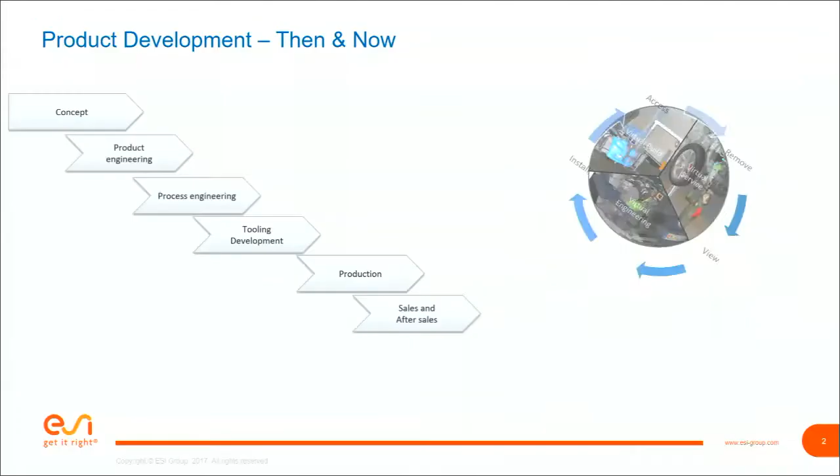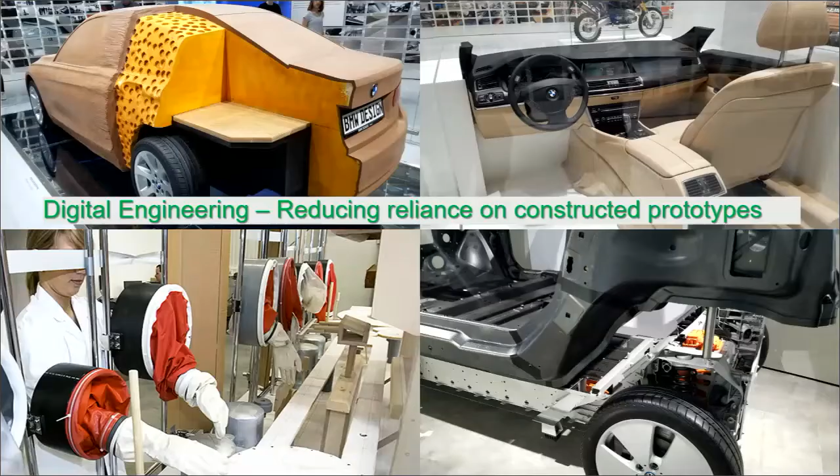So with IC.IDO, we try to create a virtual yet physically reliable, physically repeatable, real-to-life visualization—not just visualization, but an experience where I can experience the physical product I'm engineering today without access to a constructed prototype, since I've compressed the engineering timeline and removed the normal physical build points. IC.IDO lets you get back into digital engineering and access something physically reliable, that you can touch and feel and see how it looks and accesses in real life.

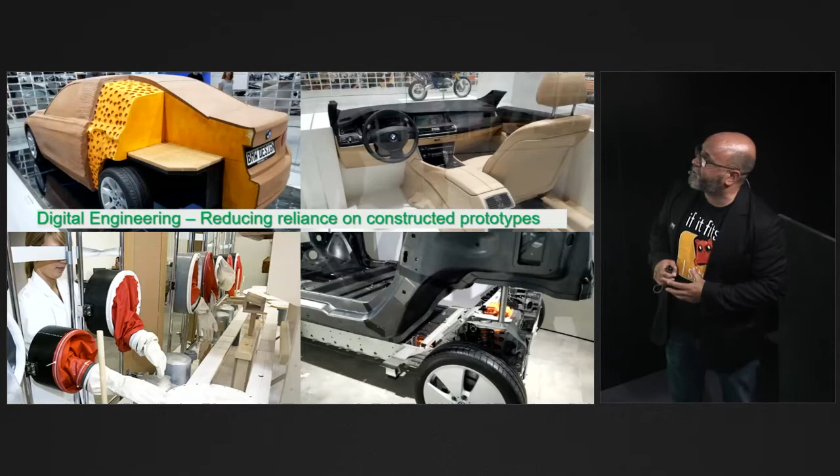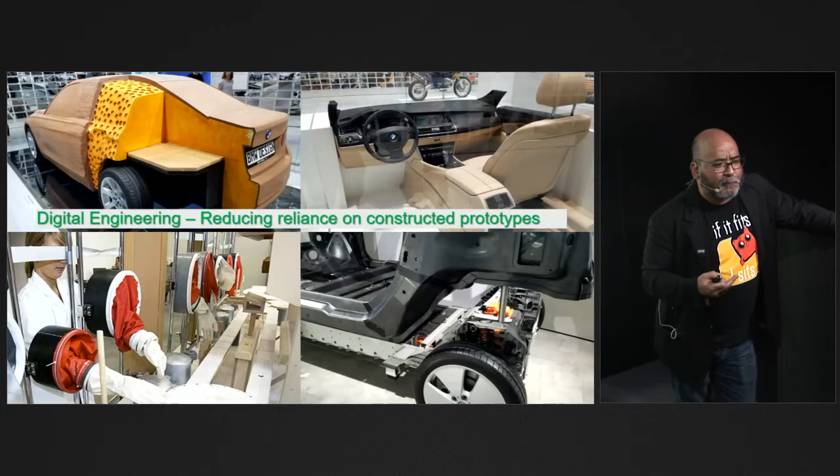Here you see one of our customers still practicing this: a cardboard, tubular metal prototype of a manufacturing cell they'd engineer for their customers. Here are clay models—people in styling and design visualization talk about doing away with clays, but there are things you can discover in physical models that you normally can't discover on a 2D flat projection. So IC.IDO lets you see and do things in a physically responsive, realistic world, to understand what it's like to touch, feel, assemble, disassemble, and service your products, working only on digital models.

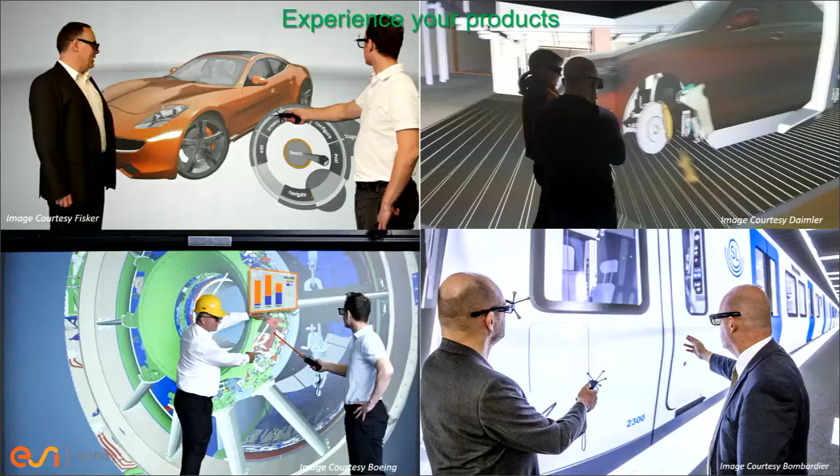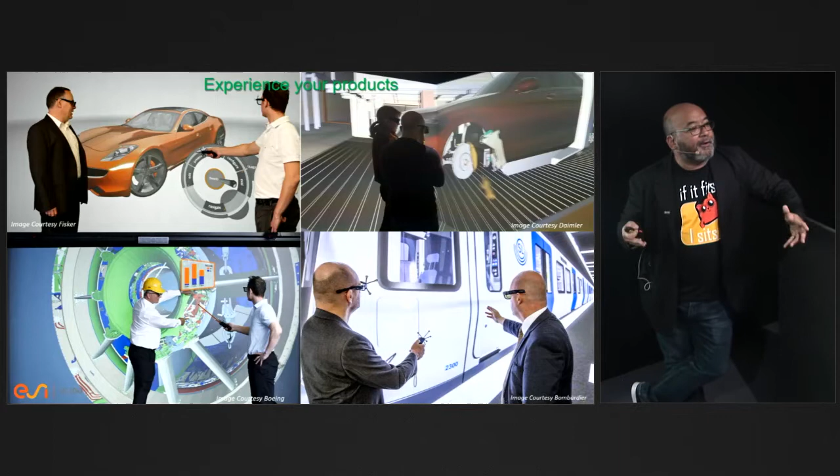These are examples of how our customers use virtual reality. Many use projected virtual reality with active stereo, but it can also be done with a more modern head-mounted display. Here people are doing engineering reviews, styling reviews of new cars, and in the top corner someone doing an assemblability and accessibility review.

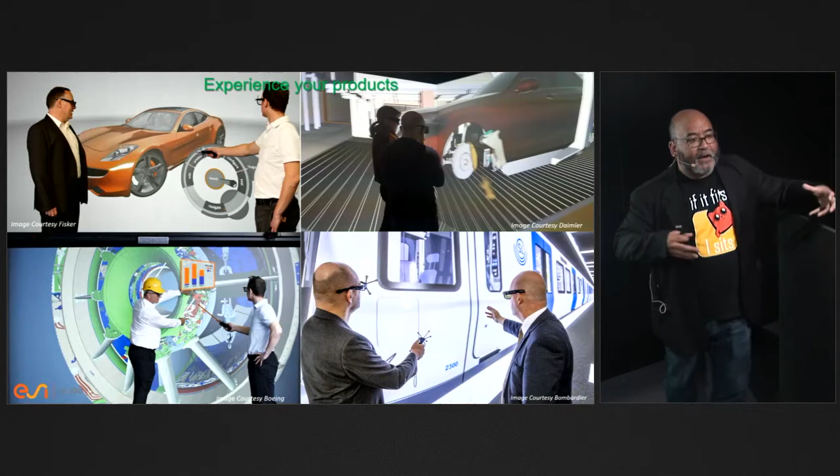We have a full-scale review of an engine turbine, and here our customer Bombardier Rail, for the first time, is able to look at a real full-scale digital model of their train, which normally they can't even view fully together in the native CAD format they draw it in. By bringing it into our environment, accelerated and powered by NVIDIA technology, they can now look at entire trains all at once in VR, whether projected as shown here or under an HMD.

That gives you a bit of the history and progression.

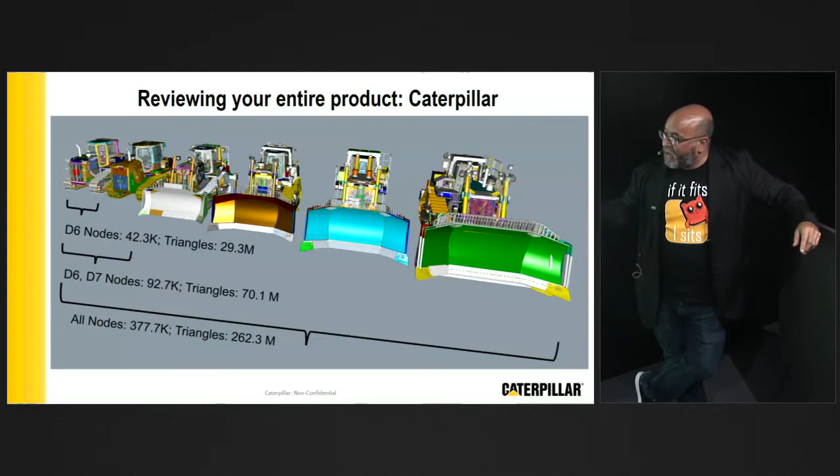But take a look at those polygon counts. For the smallest tractor they're going to sell or engineer, that's 42,000 CAD bodies and 29 million polygons. When we go to the largest in their suite and look at all of them at the same time, we're now talking about 370,000 CAD bodies and 260 million polygons.

At GTC Silicon Valley, we talked about performance—how IC.IDO has worked very closely with DevTech from NVIDIA to make sure we were able to properly leverage every new graphics architecture that came up, to see more and more performance from the graphics cards.

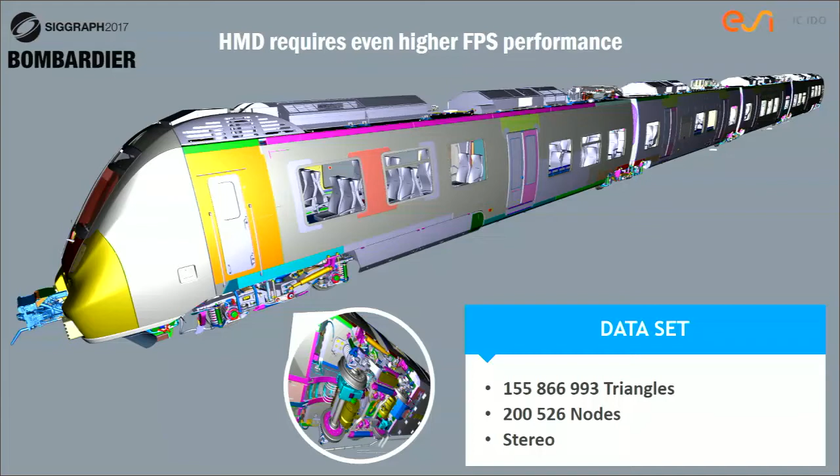At SIGGRAPH last year, I made a presentation similarly talking about how, with innovations from NVIDIA, we were able to look at this entire passenger train—2 locomotives and 2 passenger cars in between. We're talking about 155 million triangles, 200,000 CAD bodies.

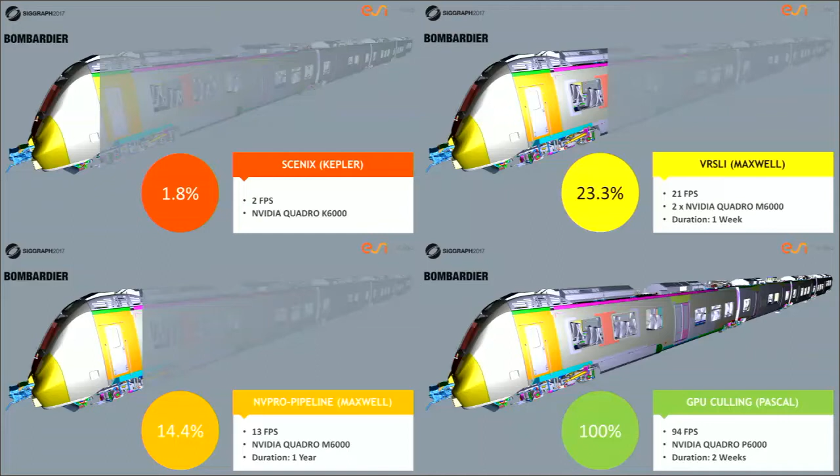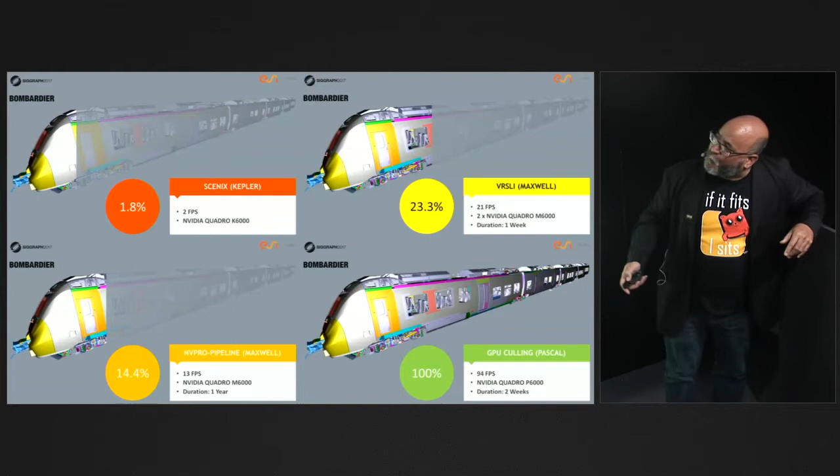Going back to the K6000, our version 10.2, that's 3 years ago for our software evolution—the frame rate if we loaded that full model into VR was about 2 frames per second. We would have had to reduce that model down to only about 2% of the CAD bodies to get a reasonable frame rate in an HMD. So I could only look at maybe the front windscreen of the train, but I don't sell entire trains by looking at the front windscreen only.

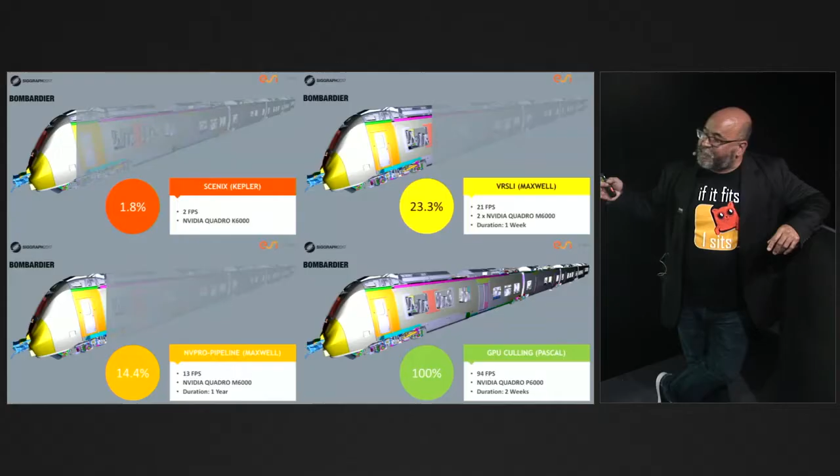Now, along comes NVPro-Pipeline with the Maxwell. Using the Maxwell acceleration, we're able to see about 13 frames per second when we load the full model, or reduce that down to 15% of the entire train.

Then along comes VRSLI. When we leverage VRSLI, we could see a quarter of the train now—that's almost an entire locomotive, but not quite. Where are the people going to ride?

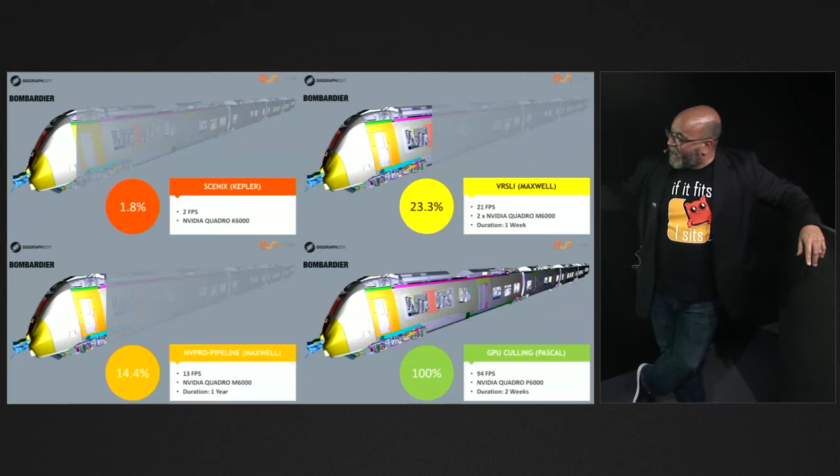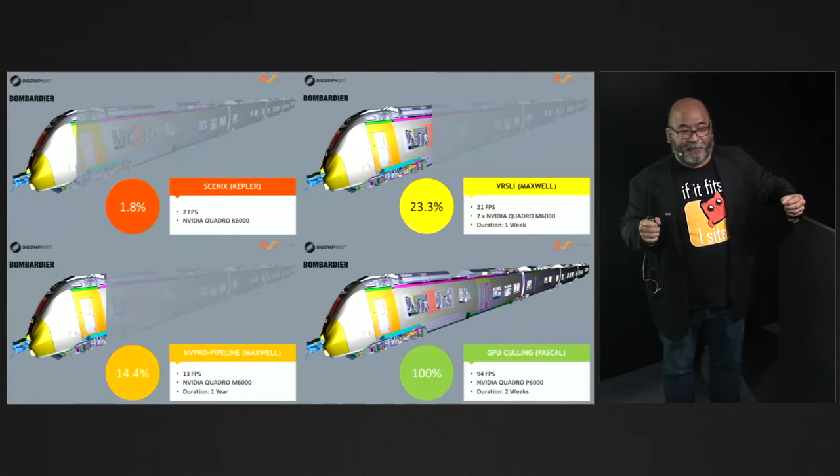Finally, at SIGGRAPH last year, we talked about using the new occlusion culling algorithm and the new Pascal architecture to see 94 frames per second in stereo of the entire train model. Our customer told us she'd never seen the whole train before all at once, except in person or occasionally as a screen grab that had to accumulate over time—letting the model build up over several minutes, then taking one screen grab as your only picture.

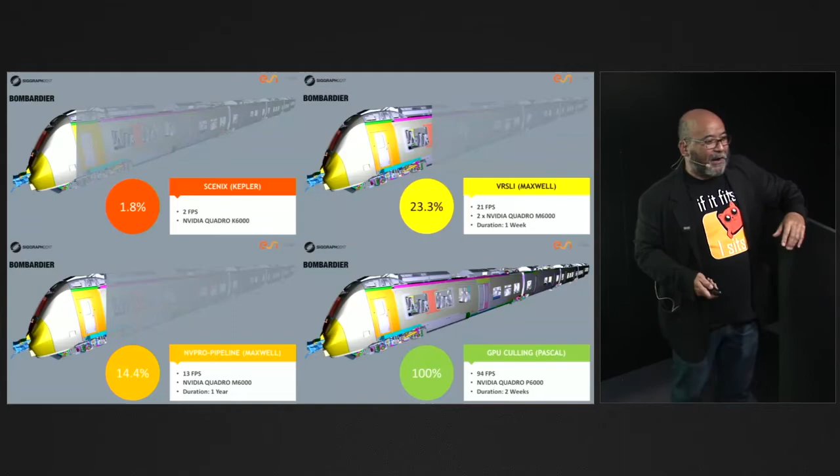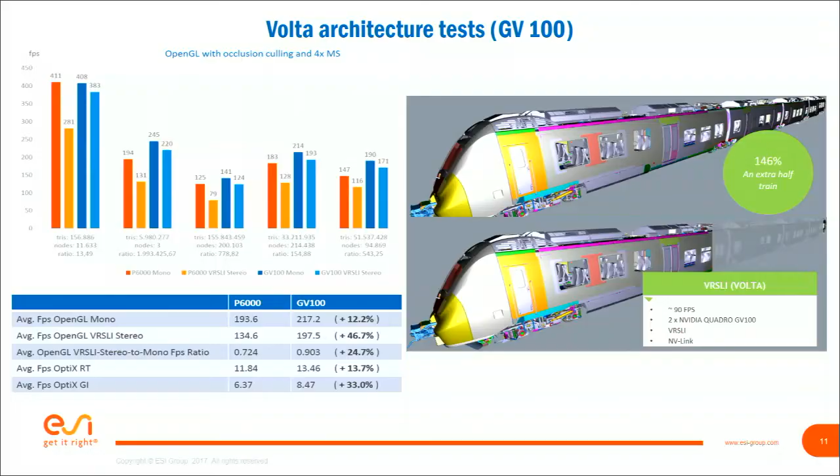Most recently, we talked about this at GTC Silicon Valley. Now, with the Volta architecture, VRSLI, and NVLink, we were able to get 90 frames per second, but with an extra 146% performance improvement—meaning I could see an extra additional half of a train. So if we were looking at a passenger train with, instead of 2 passenger cars, 4 passenger cars between the 2 locomotives, we could visualize all of it in VR with stunning performance.

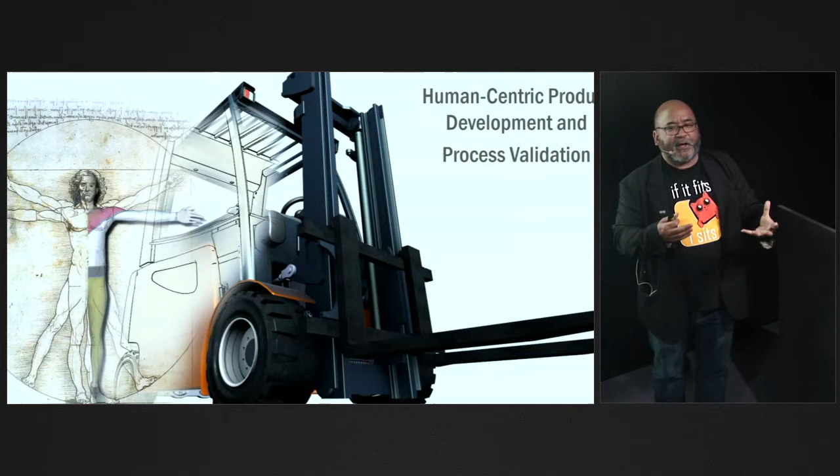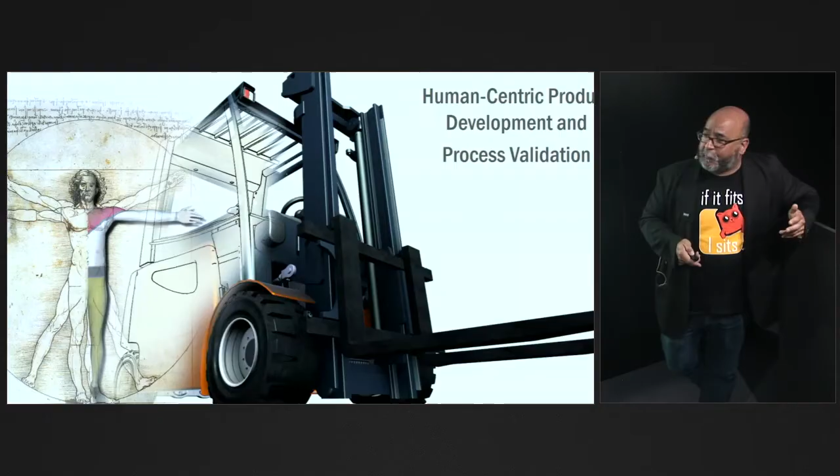Now, our focus at ESI IC.IDO isn't just visualizing engineering models. What we're really focused on is human-centric product development and process validation. We want to experience not just looking at the train, but actively participating with it—opening and closing access panels to the mechanical guts of the train, and seeing if a maintenance worker can really see inside that service hatch to access something they might have to replace or update.

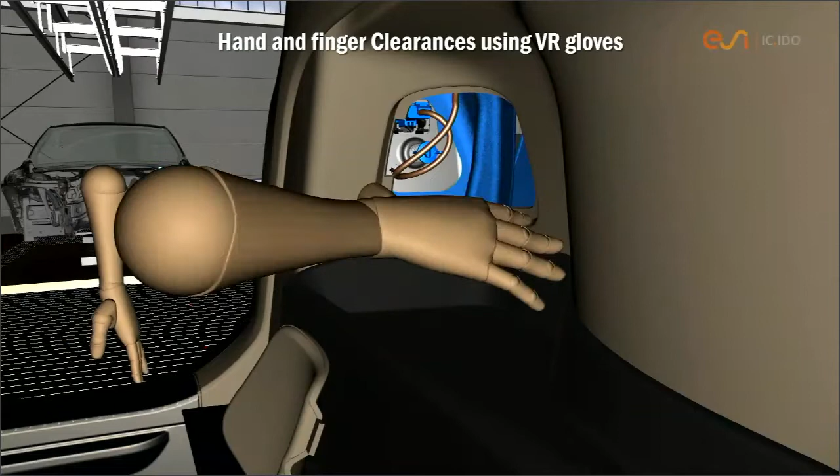Other things we've been doing—again enabled by our customers using the full CAD model—include hand and finger tracking. We've implemented Manus VR gloves and ART finger tracking so you can do real-life hand and finger manipulation.

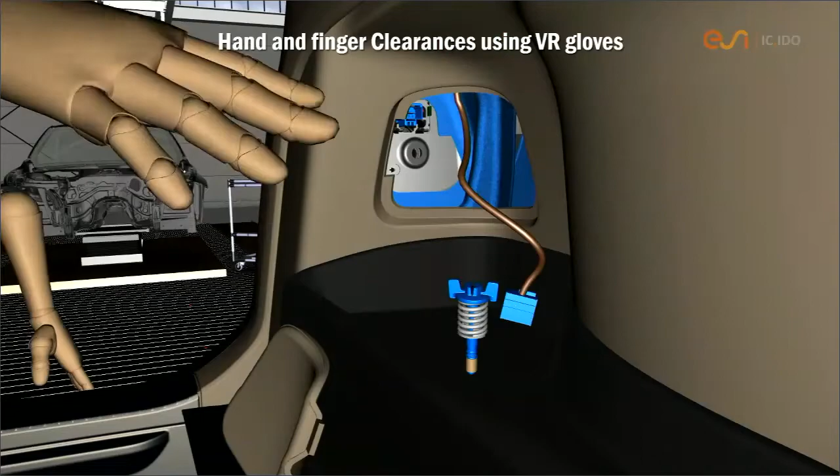And accessibility and reach of your forearm, and possibly even your upper arm, to check whether you can see into that access panel to unplug the wiring harness and then take out that little clip that secures the tail lamp into position. This is something our customers tend to overlook in the engineering or design step—somebody will say it looks like I can reach in there, it seems like I can, but in fact it's a bit of a reach, a bit of a trick to get your hand in there.

And can an average person's hand, or even a larger than average person's hand, still fit in there? Other things we've done is integrate digital human models. In this case, we've integrated the RAMSIS digital human so we can do true-to-life ergonomics assessments. We could take an animated motion of operating or disconnecting that exhaust pipe, or operating that lift assist mechanism for the spare tire, and play back that animated event with different size, different anthropometric models.

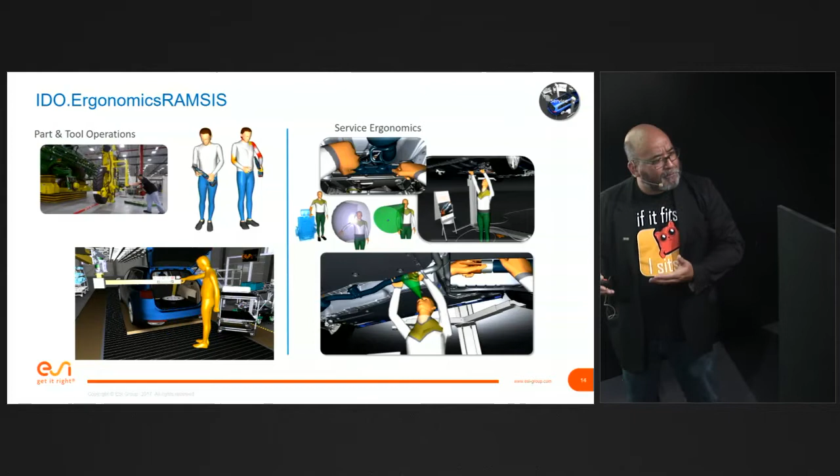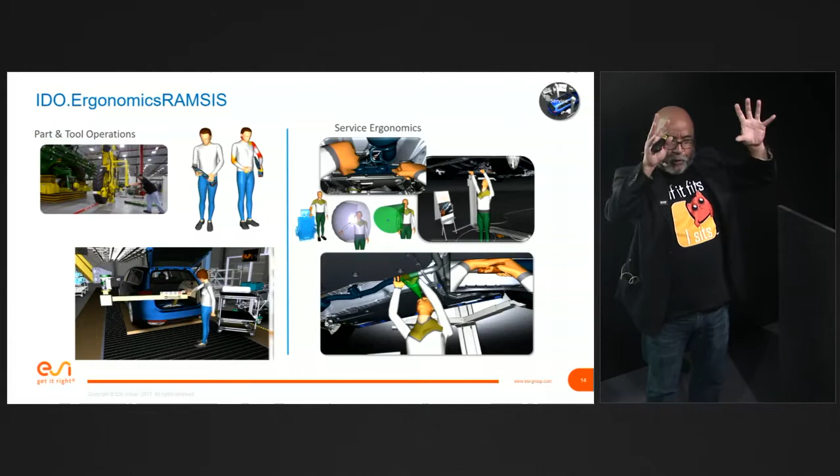So we can capture the full population of your potential workforce. This allows us to use VR to experience what it's like to assemble, service, or maintain your new product. I can take that first-person perspective. It only takes me about a minute to decide I don't like working over my head like that, or I don't like moving this mechanism around, it's uncomfortable.

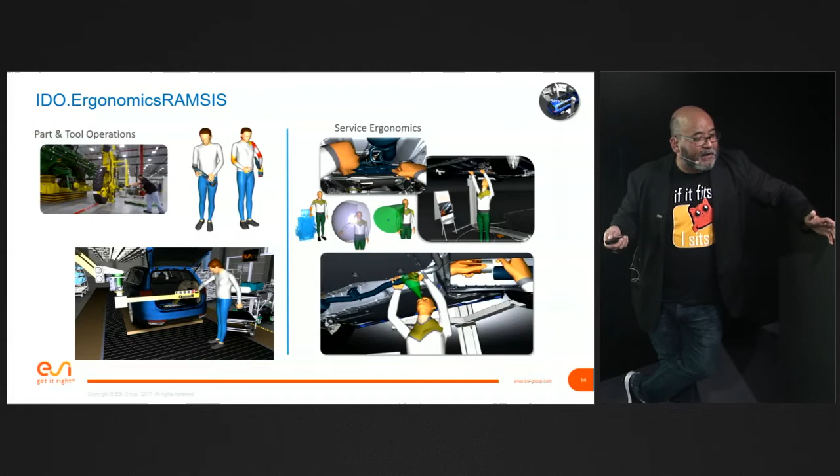But then I still have to create the data that supports that decision of maybe redesigning the product or the tool. This way I can just take my animations that I put together in first person, record that action, and play it back with different sets of digital human models to represent anything from the 5th percentile female from Southeast Asia to, let's say, the 95th percentile Scandinavian male.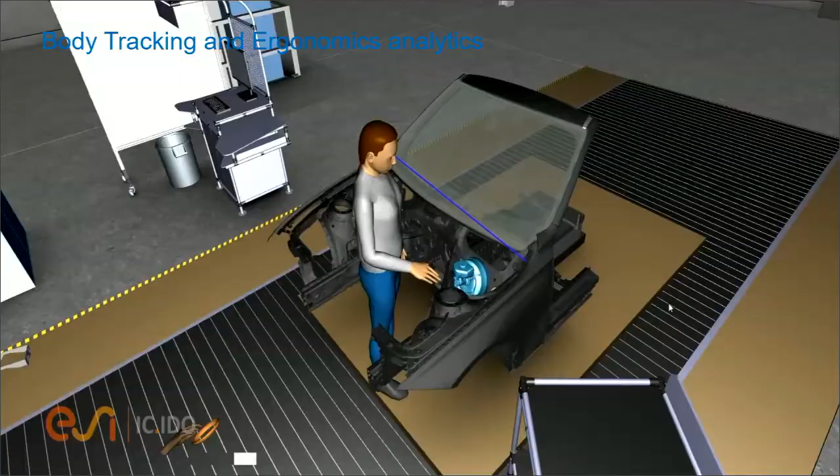We've also integrated the ability to do full body tracking so that now, in addition to visualizing an entire car - that's a Volkswagen Passat in the background, somewhere in the order of 60 million polygons fully rendered - it's coming from two different CAD models. There's the CATIA data for the sheet metal and body in white, and PTC Creo data for the drivetrain and powertrain. I can actually record myself interacting with that full model.

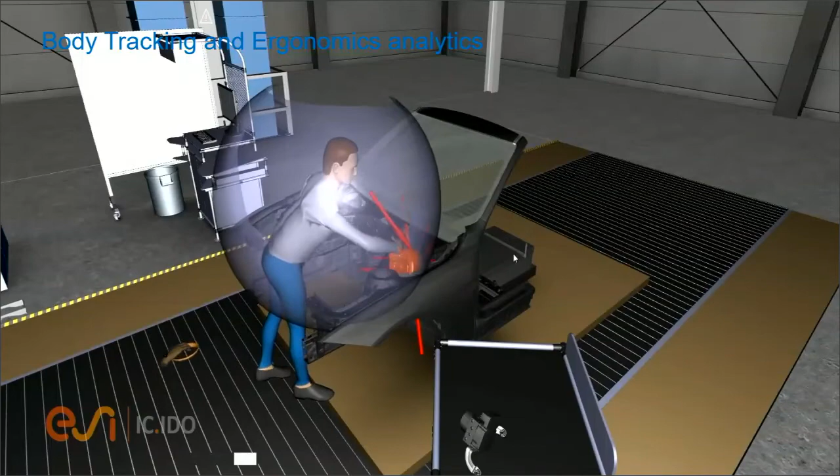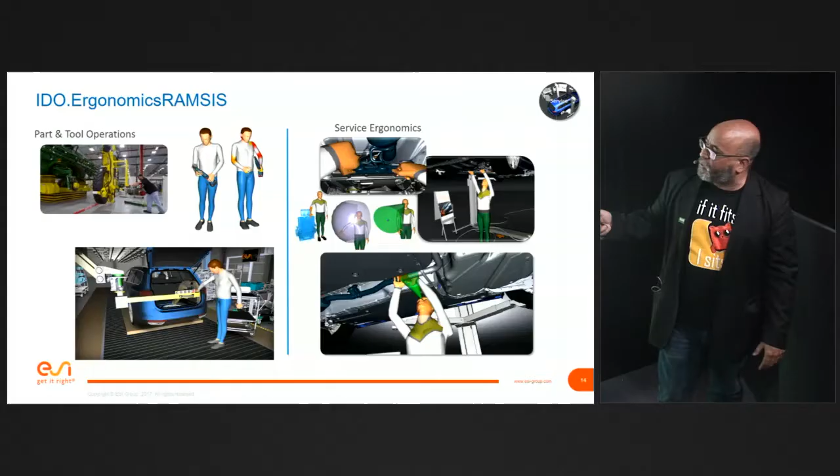Up until we had the power and ability to import the entire CAD model and experience it in VR, we'd have to have an engineer manually cull the data and only bring over the data they thought mattered. But whenever I make a decision about leaving data out because I think it doesn't matter, I'm in fact greenwashing my engineering review, telling people it's okay, I don't need to bring the whole car in, I just need part of it.

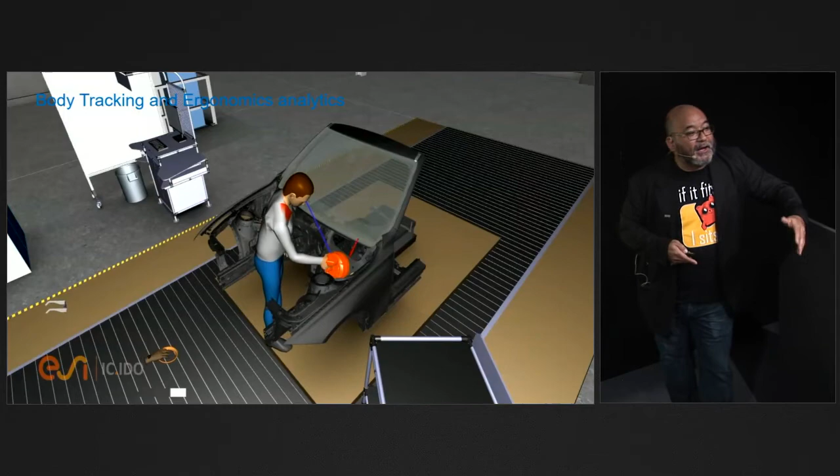And then everything else I didn't import must be okay, right? It's going to work because I didn't bother to look at it or participate with it in the engineering review. That would be a very costly oversight on our part if we tried to take that vehicle to market and couldn't prove we actually checked - can I build this operation? Can I remove that hydraulic cylinder from my steering mechanism?

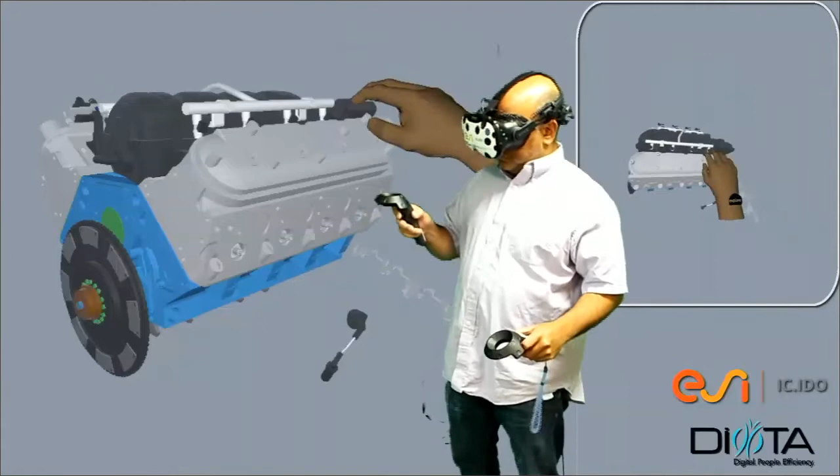Other things we're doing more recently: we're also taking the ability to do things in virtual reality when I don't have the engineering asset physically in front of me yet. I have to fully rely on VR to validate. In this case, this would be the disassembly sequence for this V8 engine, but you could think the disassembly sequence is very similar to the assembly sequence.

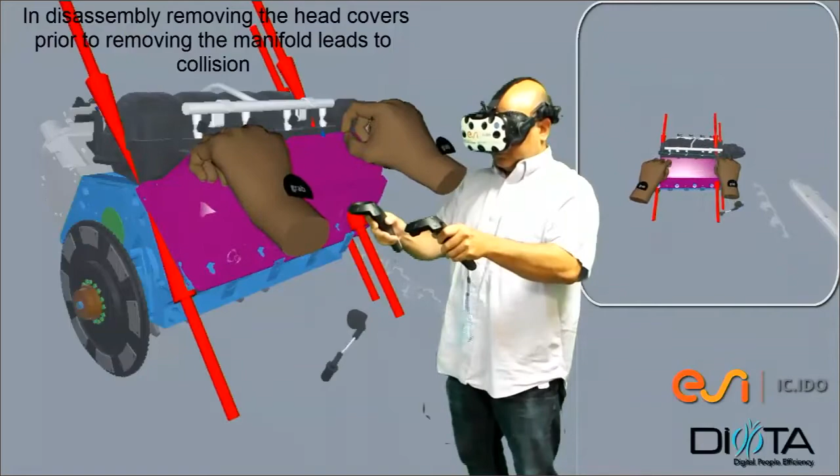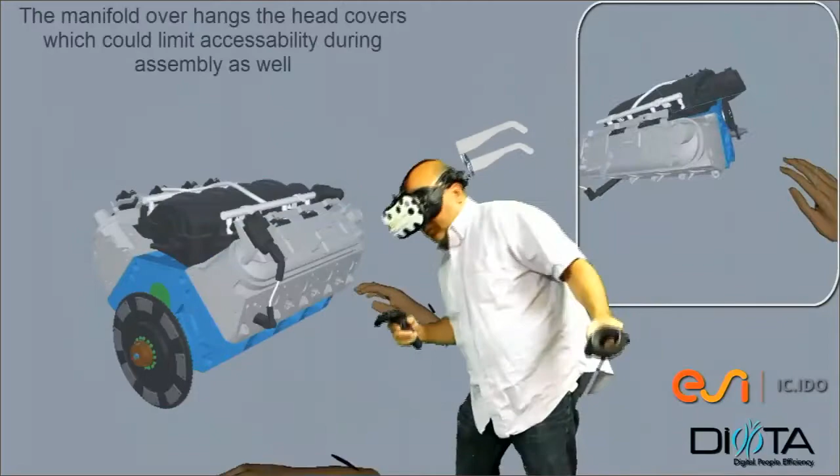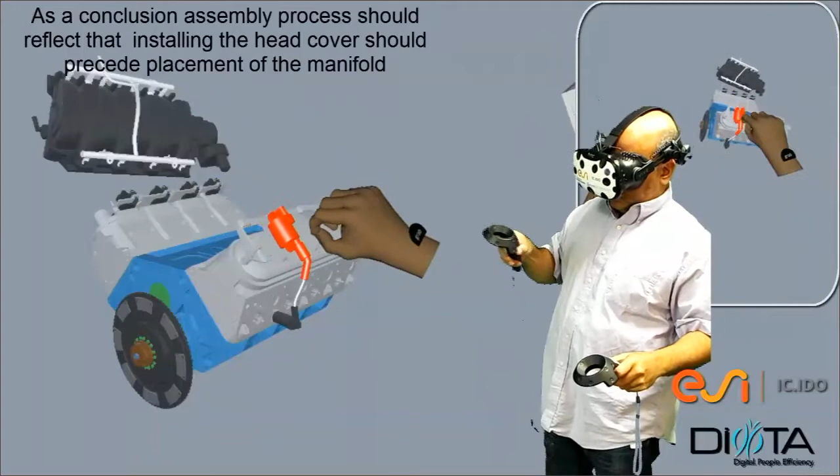And what I'm finding out here is that if I don't take that exhaust manifold off first, I can't get that rocker cover out of the way. So that means in the assembly process, that head cover and rocker cover should go in first, and then the manifold should go in later. That would have been a costly mistake if I had done my process without this kind of validation.

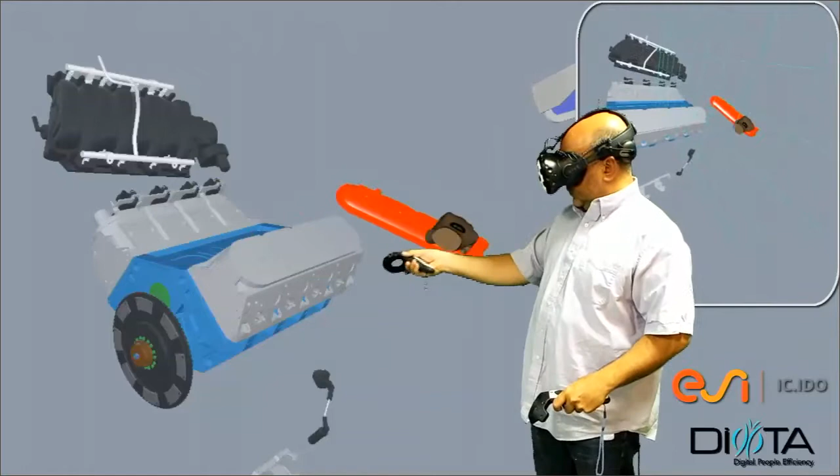Now, my customers are always asking me, Eric, this is cool, you're in VR, what are you guys doing with AR? My primary use case, I don't have the car yet, I don't have the engine yet, so I have to do everything virtual. But we've partnered up with an AR supplier, an AR software provider called DIOTA.

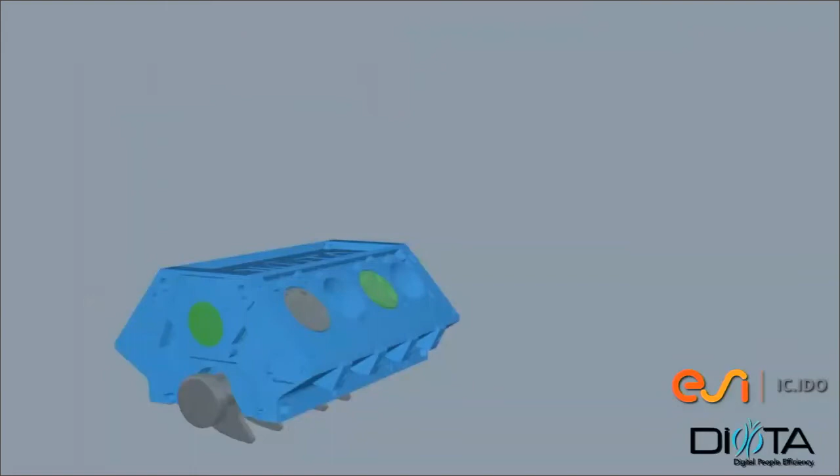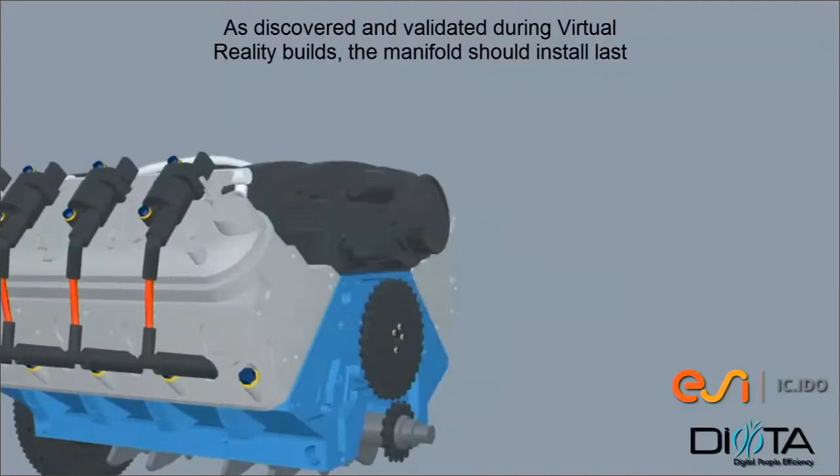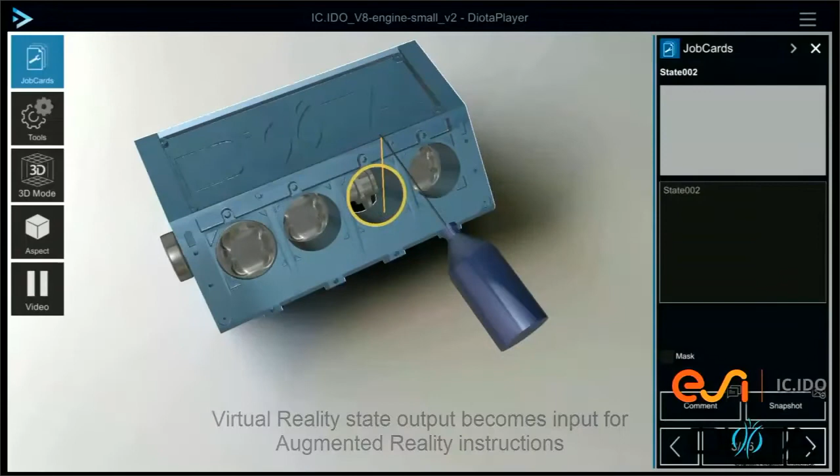DIOTA has this capability to take our digital assets, where I can now save the state of the disassembly or reassembly of those objects, and export those objects for direct use by augmented reality tools. So DIOTA and us have partnered so we can take these digital assets from VR and use them in AR. This is a screen grab from a tablet-based AR device, where we're using the tablet tracking with a model of that V8 engine, and I can play back the sequence of installing those things that I proved was the correct assembly sequence in VR.

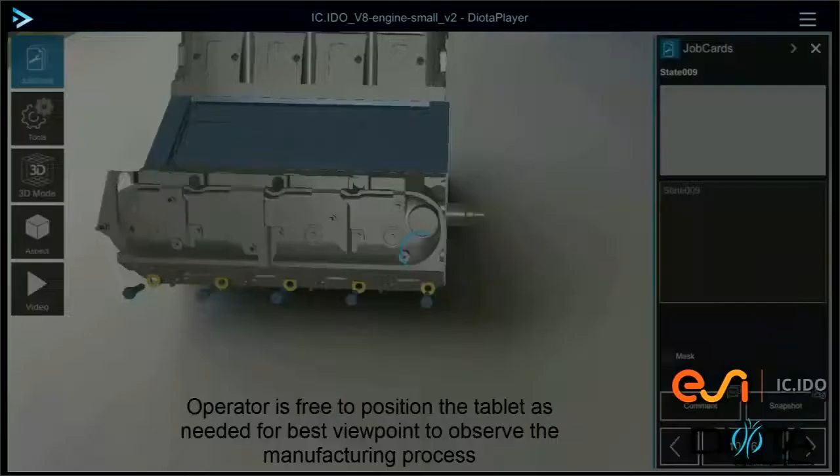And this has always been a challenge for a lot of people doing AR authoring for work instructions and such, because the normal workflow of creating AR digital assets is such a long and laborious task that sometimes they do that task in parallel to the engineering validation of the assembly or service sequence.

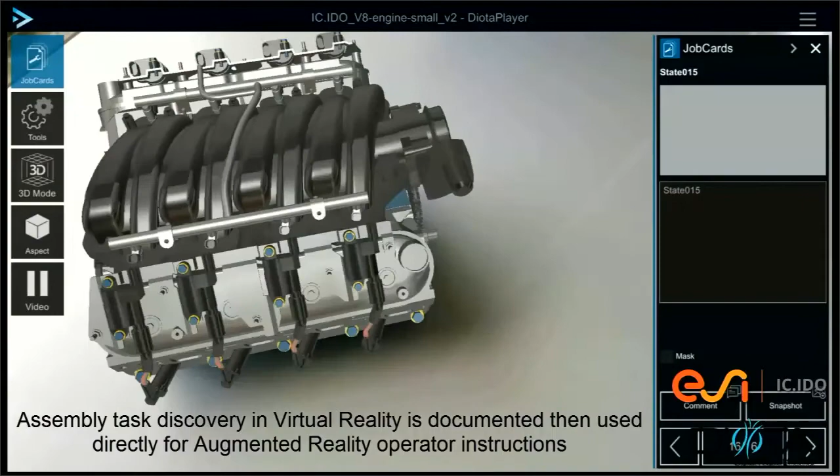And sometimes they find that, hey, you made a really nice AR assembly document, but it turns out it's wrong. It wasn't validated. And we want to use the same digital assets for validating our assembly sequence.

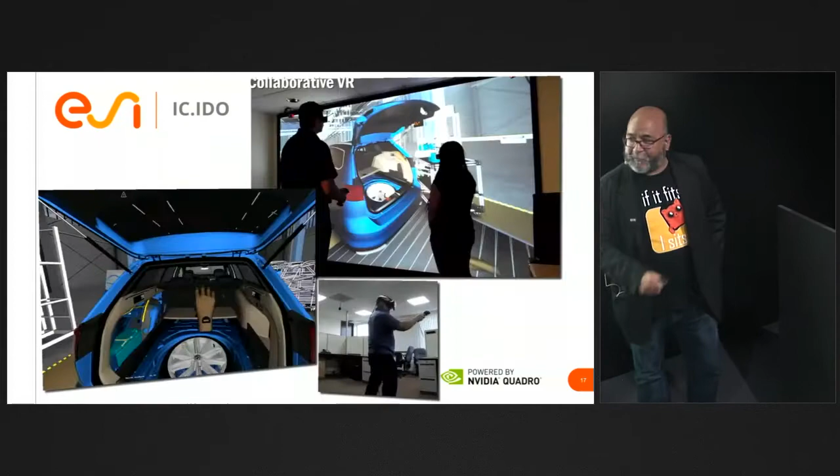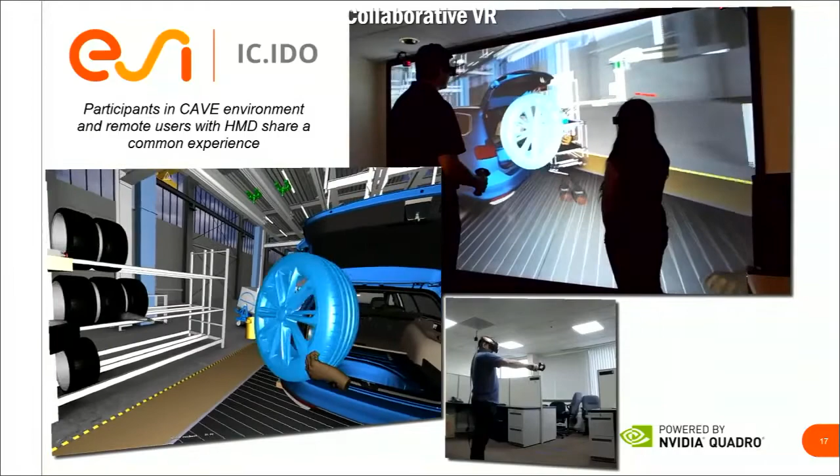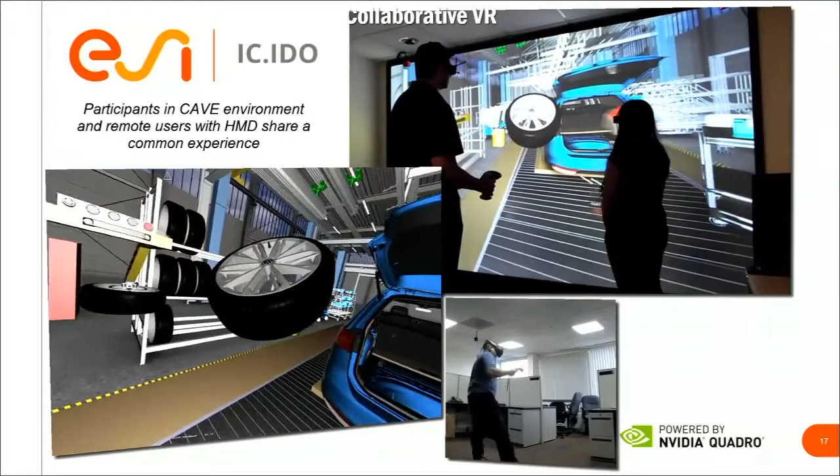Other interesting things we're able to do in VR, again benefiting quite a bit from what we've learned from NVIDIA. This is a video I put together that I've actually played now for almost 2 full years, at GTC Silicon Valley in 2017. I was doing collaborative VR downstairs in the exhibition area, the same time Jensen was talking about the innovation of holodeck, and I had to go around telling everybody, we're doing that already today.

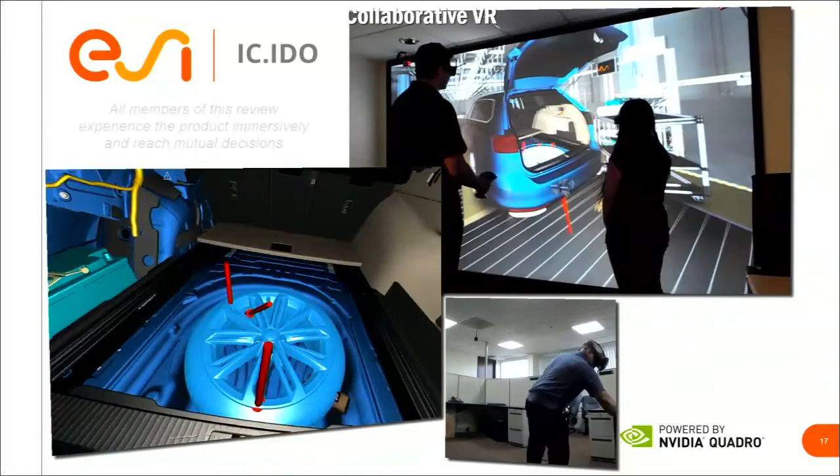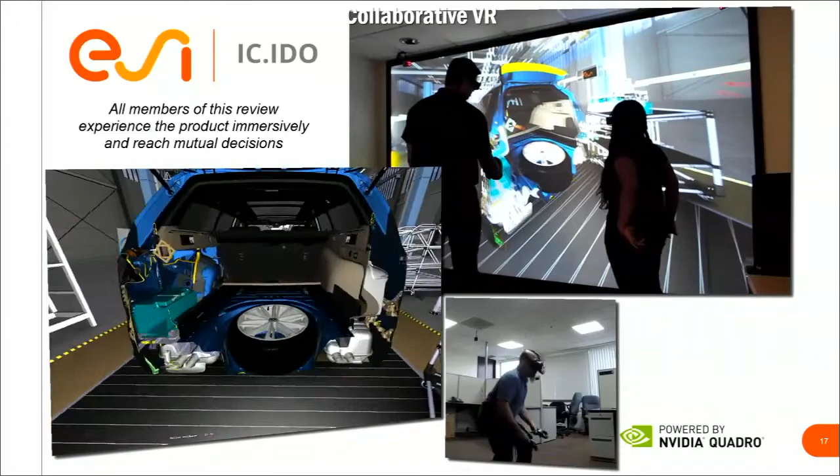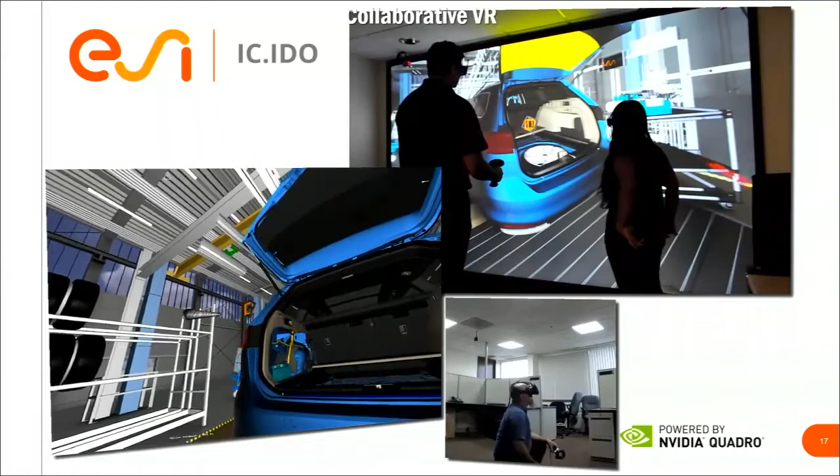Here you can see, that's me with my beard doing HMD assembly or service validation of this Volkswagen Passat. There's my colleague and his boss doing an engineering review in front of a large power wall. So we're able to do collaborative VR across different platforms, whether it's HMD to HMD, HMD to a power wall or a cave, or even HMD to a desktop.

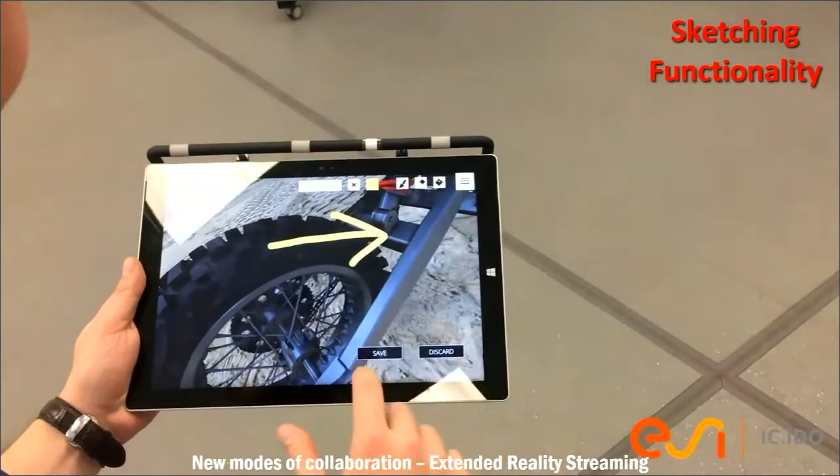Another mode of collaboration we've been experimenting with, and actually delivered to one of our customers, is what you might think of as an augmented or mixed reality use case. Our customer at Jaguar Land Rover has a large motion capture room, and in that room they've mounted tracking targets to Windows tablets. It looks like the middle of the room is empty, but apparently there's a dirt bike in the center. This guy's able to walk around that dirt bike, or now we're looking at a Jaguar Land Rover sport utility vehicle, doing an engineering review of an empty room while looking at the 3D digital assets.

We can have up to 8 different tablets walking around, each collecting and observing their own engineering insights into whether this is a good, acceptable design. They're able to do that work independently and collect all their feedback into the 3D session for a group engineering review. As opposed to a typical engineering review where one person drives the screen and others say let me look at the front, the back, inside the car, these guys can all look at what matters independently to them.

So those are the things we've already done, that's the present. What are we looking at as the possible future for virtual reality, especially when you think about what Jensen announced on Monday or Tuesday with the whole idea of the RTX server?

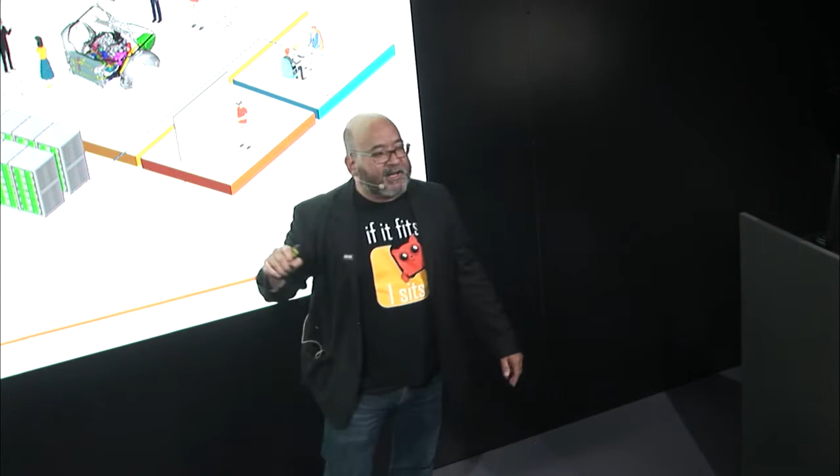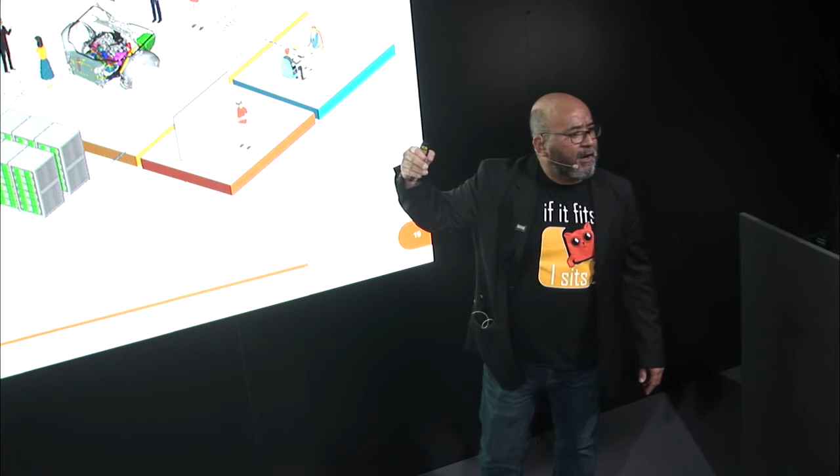Imagine this as the RTX server, acting as a unified VR data center, where that data center, when necessary, can drive a whole bunch of people working on desktop doing their day-to-day virtual reviews of product and process designs. Occasionally that data center should be driving an immersive environment, a large power wall, a cave, or a bunch of HMDs.

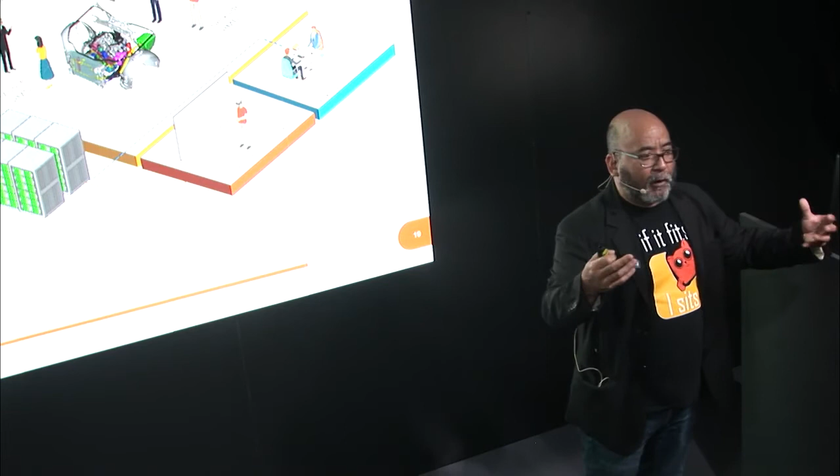But in the meantime, what if we could also send that out to a remote location where people are using tracked tablets, HMDs, desktop installations, or really crazy, mobile VR, mobile HMD? Can we do that today? We propose it's possible that if we build this kind of infrastructure powered by the RTX server innovation, we could have this GPU going across the enterprise network, providing all of that rendering horsepower in the size you needed it at the time.

All right, so how do we get VR everywhere? This is a quick video, as I'm running out of time, of a new project we have called Verify.io. It's a little project we're bootstrapping inside of ESI today.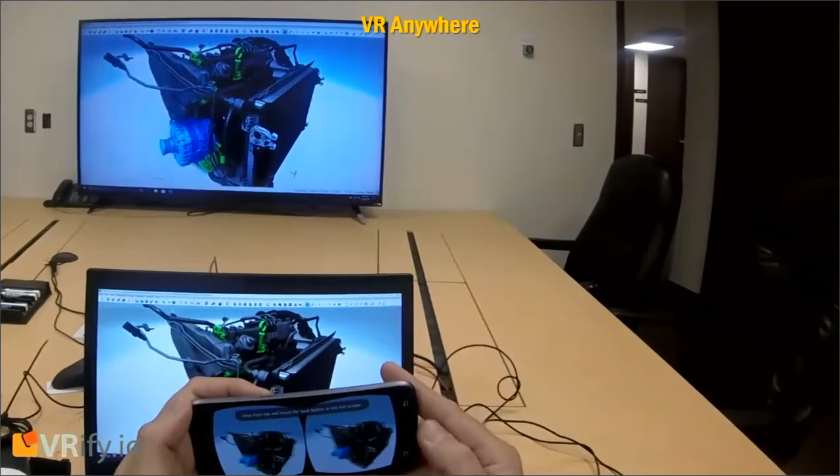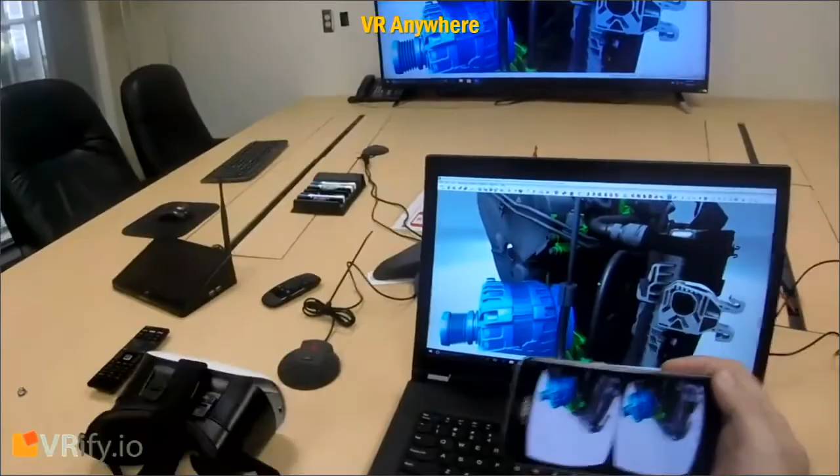What you might notice in this video, that's my cell phone, a Galaxy S7. I'm streaming what you see here on my laptop, but that could be a server client or server host. I'm streaming that as a full 360 omnidirectional spherical view of the same CAD bodies without having to do any minimization or optimization of the model. That's in fact the full CAD model streaming out to my cell phone or to my Daydream viewer.

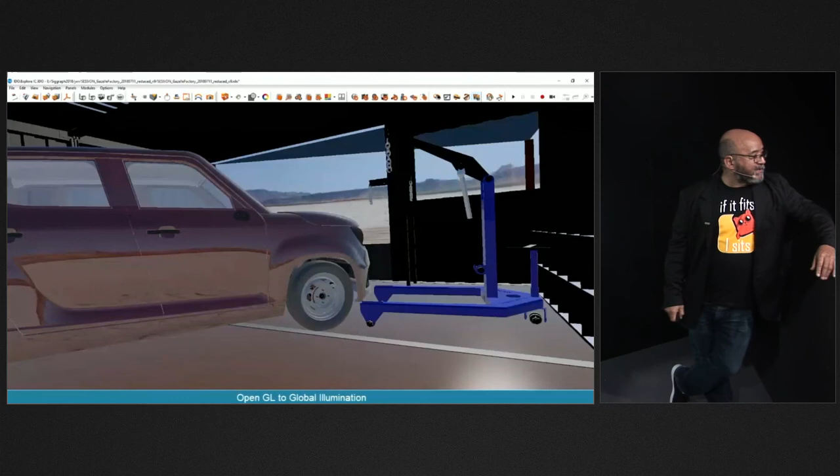Questions, comments, snide remarks? I think I'm... any more questions? Okay, let's give Eric a big round of applause.